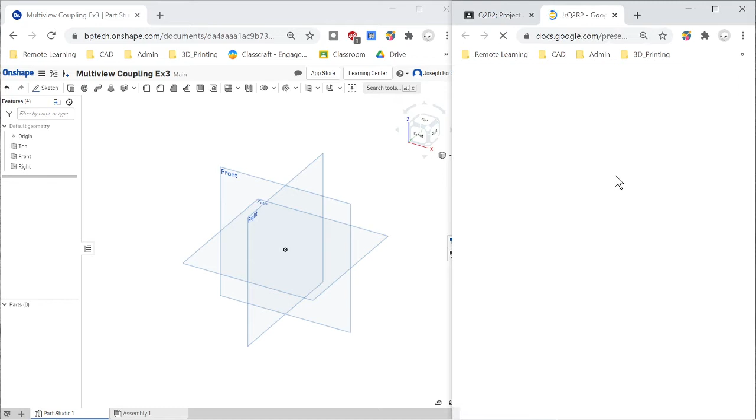And just to make sure what the material is, I forgot what I assigned it as, so I'm just going to check it out. And it is A2 stainless steel.

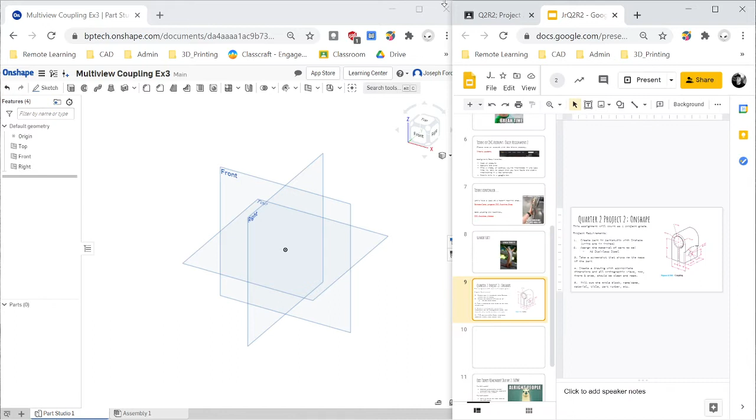So at the end we will assign A2 stainless steel to it. And alright, here we go. So first thing you want to do is create the outline of this object and then cut out this little center piece of it.

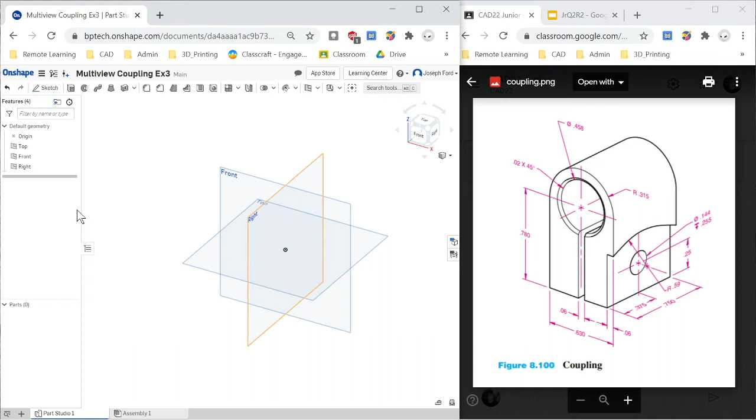So create a sketch, click on front plane, view the front plane, and you can start with a circle, and I'll start that in the center. Dimension that circle, hitting the D hotkey, and we have a 0.315 radius. So we're in diameter, so I gotta multiply that by 2 to get my diameter of 0.63.

So now from here I am just going to create a rectangle, and the corner will be here at the quadrant of that circle, and then I'm going to move down, and I can dimension this.

This is 0.78, and my width is going to be 0.63, and I'm going to trim out these lines.

And then I'm actually going to go ahead, so I don't have to create this and then make a cut, I'm going to create these hollowed features, so then when I extrude it, it's going to extrude around where those holes are. So I'm going to create another circle with a radius or a diameter of 0.458.

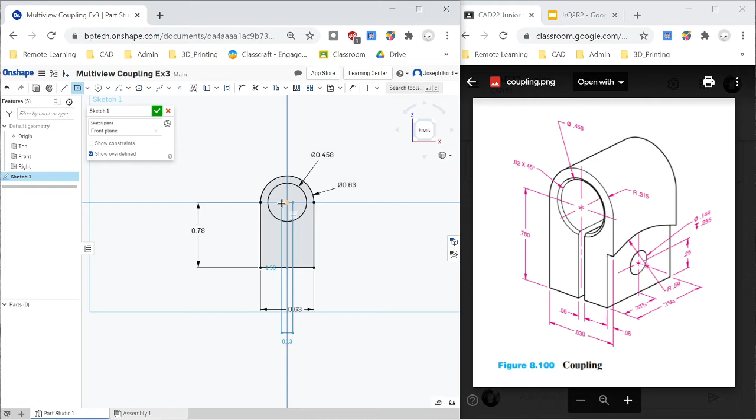And then I'm going to create another rectangle. This time I'm going to use the center rectangle, and then I'm going to dimension this out, and that is 0.06.

And then once again I'm going to use the trimming function, so the scissor, or click the key M, and then I'm going to trim out where my hole would be. So trim this, trim this, trim this, trim this, trim the bottom here, so it's an actual hole.

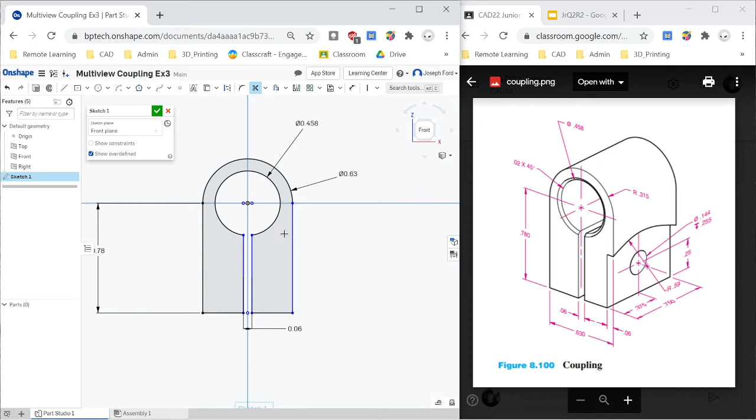I'm going to get rid of this guy down here too. And yeah, so we have that little rectangular channel cutting through. We have our circle, and now when we extrude this part, I'll get the solid version.

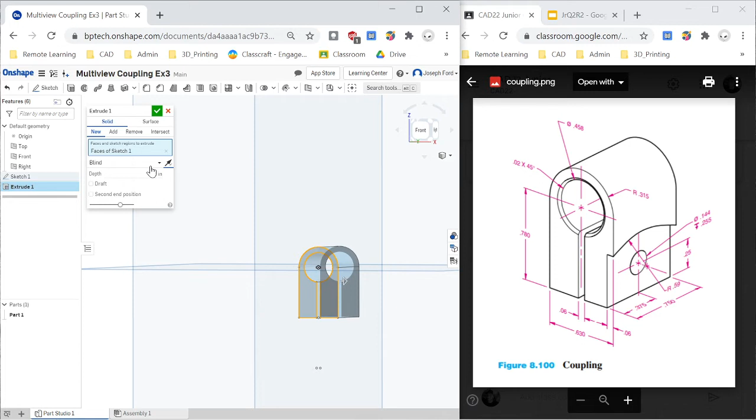And I'm extruding, making sure I'm extruding in the correct direction. I want this to be my front face, so I just created the front face, so make sure it extrudes backwards, and we are going to extrude that 3/4 of an inch, so 0.75, and check it off. So now we have our basic shape here.

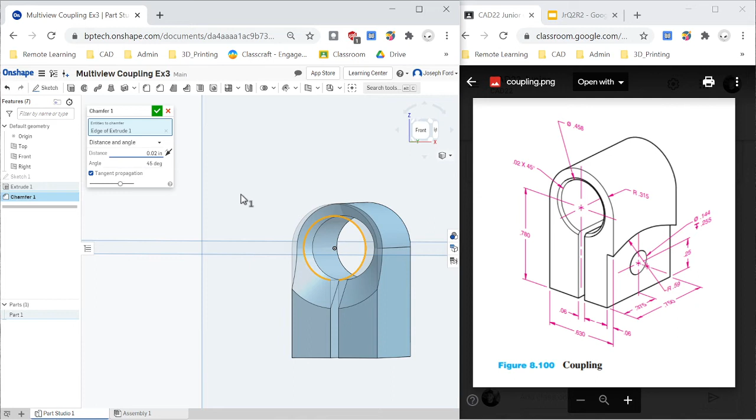I can add a chamfer now, and I'll chamfer this edge here, and I want to have a distance and an angle. The distance is 0.02 and it's by 45 degrees, so I'm just going to change up the distance right there and check it off.

Now I am going to make this portion here. So this is a little tricky. I spent some time looking at it and I couldn't figure out where the center point for this radius is in order for it to actually work.

So we're going to assume that the center for this radius up here is the midpoint of the bottom edge of your part, because that's really the only one that makes sense. I've tried it here and it doesn't make sense to have the center here—it makes it much too big. I've tried a bunch of different scenarios, and that's the only one that makes the most sense, is if the radius was at this center point of the bottom edge.

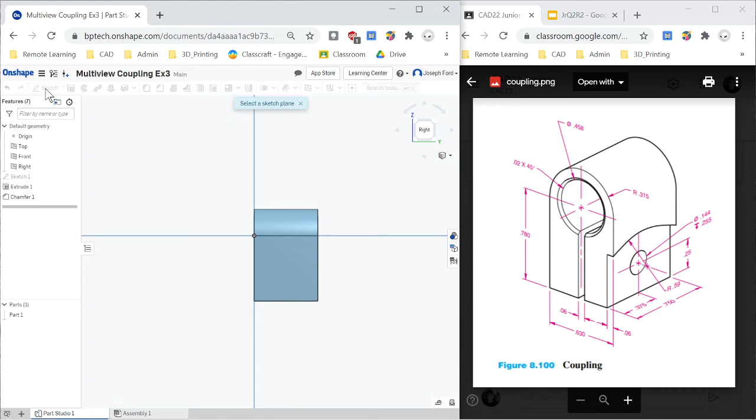So we're going to do that. Click on right view, I'm going to create another sketch. Click on the face, and then you can go ahead and make either an arc or a circle. It doesn't really matter. I'm going to do a circle, and this center point here, move up, and remember it's a circle, right?

So if you have a radius, you can input a circle, and you just have to remember you got to double it. So double the radius of 0.59, and you can easily just multiply it like that.

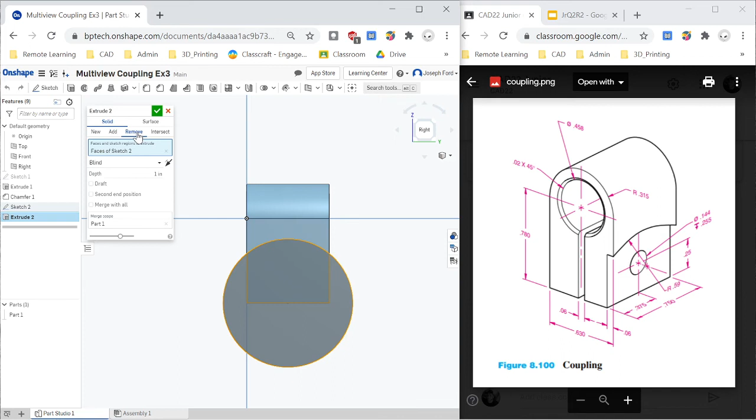And then I'm going to extrude, and this is remove, and I am removing 0.06. So 0.06. Check it off, and then I got what looks to be the correct version over here.

It still does look a little higher. I was kind of beating myself up about it, but for this exercise, we're just going to assume that this is the case—the center point is at the edge there. And then from this radius being cut out, we're going to move to the hole.

So I'm going to go on the right side again and create a sketch on this section here. I'm going to make a center line, so the center line extends up. Dimension that to 0.25. That's our distance. And then I'm going to create a circle at that endpoint.

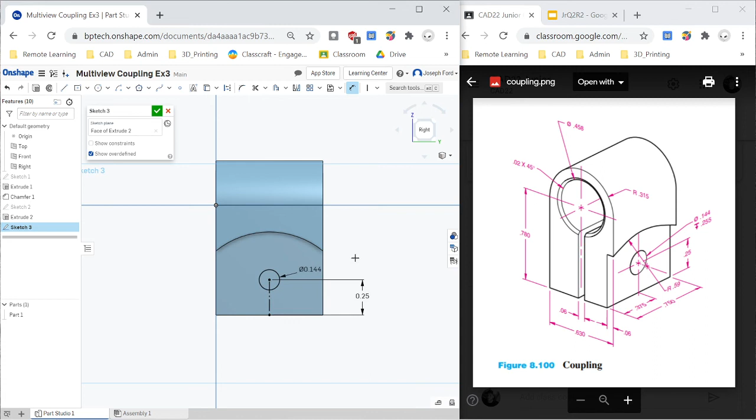The circle has a diameter of 0.144, and I am cutting in, so removing, and the depth given by this symbol here is 0.255. So 0.255, a little bit more than a quarter. So then it looks good.

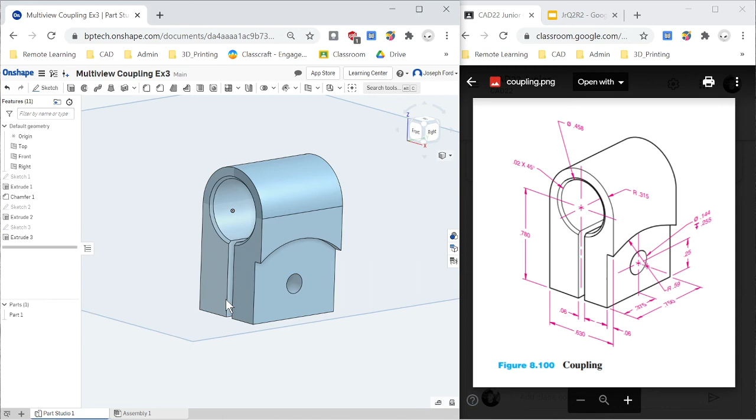We have our cuts in place, we have our chamfer, we have the square channel going through, and we have our coupling. A coupling is used to put together pieces of pipe or hose or whatever you got. So this would most likely have a thread to it, and you would thread this portion down, and it would tighten up around the two ends of your hose or pipe.

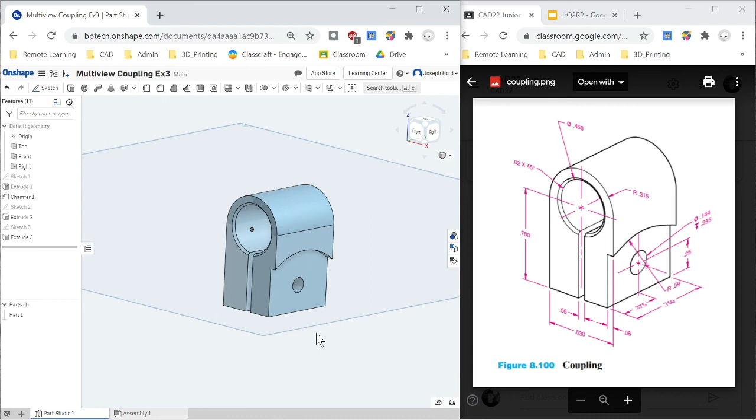So the last thing I need to do is assign that material. Assign material, A2 stainless steel, select, check it off, and then to get my mass property, I'm going to click on the mass property, the little scale over here, click on your part.

And then the mass of it is 0.089 pounds, right? Which makes sense—it's a little coupling. It's not even an inch long. So it's a little coupling, so it makes sense that it is rather light.

So there you have it, the first part of the multi-view coupling exercise. I will be making a drawing in the next video.